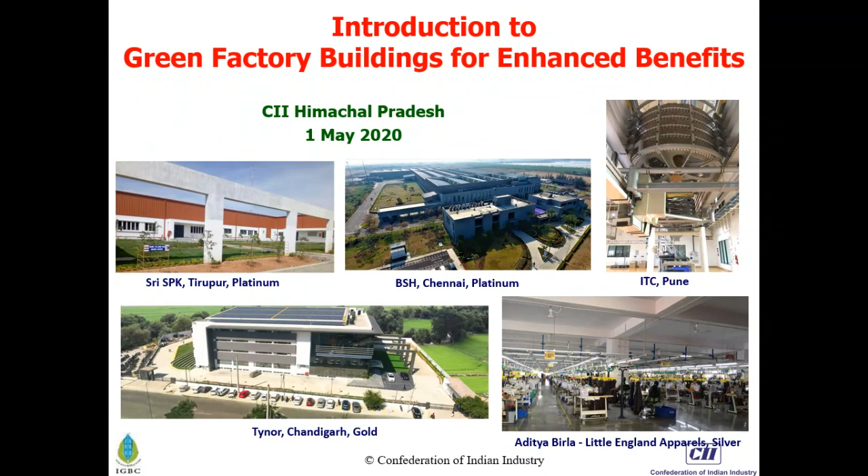Good afternoon, everyone. Hope you are able to listen to me and also able to see the presentation slide. First of all, we would like to thank Colonel Pathak and architect Jeet Kumar Gupta ji for leading the green building movement in areas of Punjab, Haryana, Himachal Pradesh, areas which have very rich biodiversity and huge scope with regard to green development. With their support we are getting a number of projects of different typologies.

We are really thankful to them for guiding us, for giving great support in leveraging our best practices with several building stakeholders. So friends, today's interactive meeting is hosted by my colleagues to interact more about the Green Factory Building Rating System, which is one of the programs by the Indian Green Building Council.

For this particular webinar, I have kept two objectives. The first is to introduce all of you to the green building movement in the country, the key concepts implemented over the last 20 years. Then I have kept more about the Green Factory guideline and the implementation showcased by several different types of factories. This will help all of us understand and explore some of the good measures implemented, which are able to offer tangible and intangible benefits to the projects.

So friends, hope you have visited this building. If not, as and when you are there in Hyderabad, possibly after lockdown, please try to visit the building. This is the building which played a pioneer role in the country with regard to green buildings. If you see this building, you will find many different things which we normally don't see in other types of buildings, like there are two pillars.

There are inclined roofs. You will find a lot of green surfaces over the roof. These are different measures which are helping the building reduce energy consumption and provide more comfort to the occupants. With that, it also has practices so that it will not create a hot environment surrounding the building, and with that it achieved the platinum certification in 2003.

And after like 20 years of journey, this building was converted into net zero. So friends, if you understand correctly, a green building is one which provides several benefits with regard to energy, water, natural resources, occupant comfort, and many others. But after 20 years of leadership, you find there are some advancements in every technology.

Friends, when we deploy something and we find some tangible benefits, the propagation, the kind of spread, is much faster than getting some intangible benefits and having a very slow path. So friends, green building offers several benefits. They provide optimum performance of the building, and because of that only, the building played a leadership role since 2001.

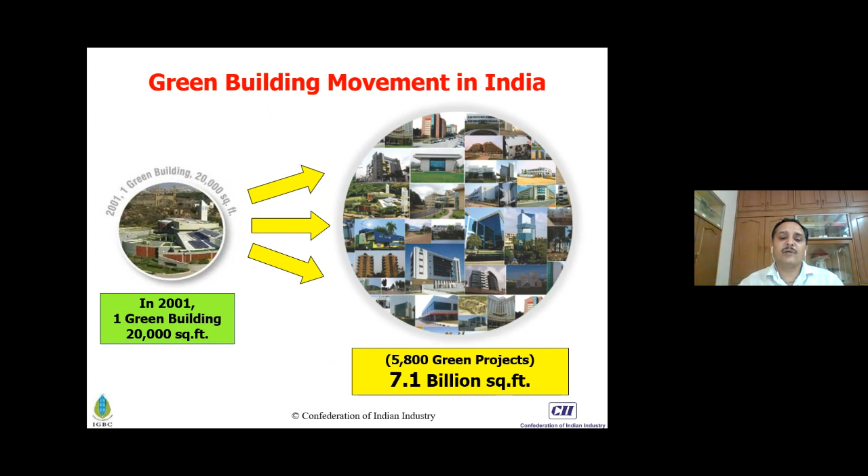Today we have more than 5,800 green buildings registered in the country. Many more than 2,000 are fully functional, fully certified, and this includes the total green footprint of 7.1 billion square feet. Friends, it is your contribution where, with support of your leadership roles in different parts of the country, this graph can be achieved, can be taken to great heights. There, India can become a global guru for the rest of the countries.

So friends, when we talk about the role from different individuals, here we see some scorecard. Today, more than 5,800 projects are registered with green buildings, and this encompasses more than 2,000 members from different organizations and companies. Today, IGBC has more than 27 chapters. This means we have presence all over the country in almost Tier 1, Tier 2, and Tier 3 cities.

Friends, without rich academia or professional development, a sector cannot be grown. Likewise, green building cannot have more wings if there is no professional available offering services related to green building. In 2001, it was realized well in advance, and IGBC started an exam called IGBC AP, Accredited Professional, and today there are more than 4,300 professionals serving the country for different types of products and green building certification programs.

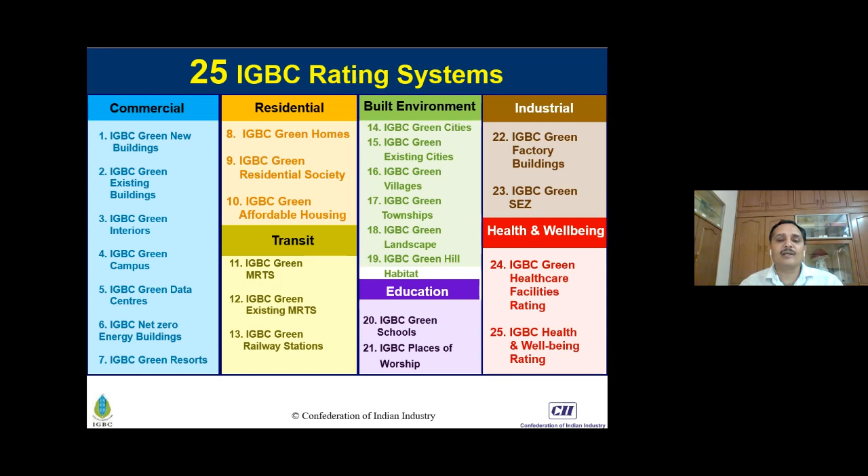In the last 15 to 20 years, IGBC has developed different types of rating systems. They are serving primarily commercial, residential, transit, built environment, education sector, health and well-being, and there are building codes available for industrial building typologies. This is a learning which IGBC has understood well in advance, to have different rating systems for different typologies. We cannot have a rating suitable for an office and implement the same replica for a hospital. So likewise, sector specific, typology specific rating systems are developed.

Another good example is whenever we think about green, our mind would always go to the areas where we find windmills or renewable energy sources, or sometimes we may think about water efficiency. A drop may give more literature to us to think about how water is precious for us to save in different typologies of buildings.

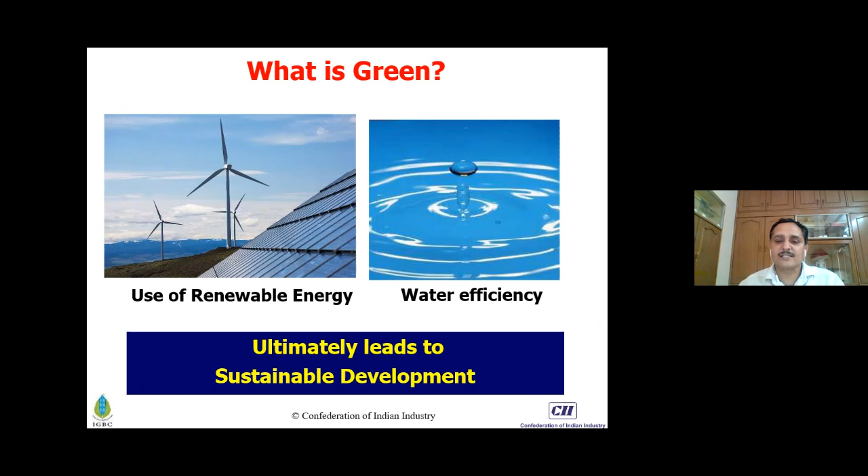Ultimately, all these imprints are the real cause for sustainable development. So friends, when we talk about sustainable development, it is not our greed where we try to capture each and every component of the resources available to us, but we use all these resources very wisely so that it doesn't create any harmful or negative impact for the rest of the globe or the environment.

So friends, when we say green building, we should think about what is the definition of green building and how it has better features than a conventional building. A green building is one which uses less water, optimizes energy efficiency, and generates less waste, which will never have any impact on the environment, and it provides healthier benefits. It provides healthier spaces to the occupants so that they are more productive in the buildings. They have lesser absenteeism, and their health is better than in all other spaces found in conventional buildings.

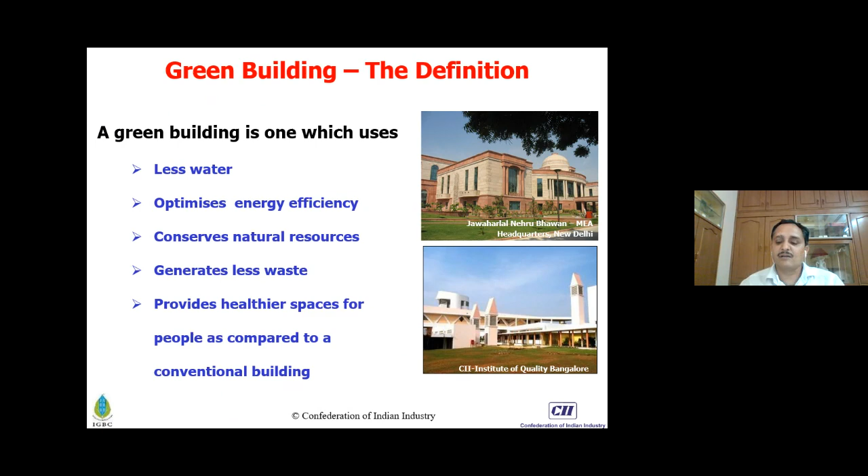So friends, green building has a set of areas with regard to site selection and planning. One is water conservation, the next is energy conservation, and the material resources we use for several building typologies - how to optimize them. This is a very important area, and material is one which creates a lot of negative impact for the environment. If we allow more and more transport of material, it creates negative impact. We have to reduce it, we have to optimize it.

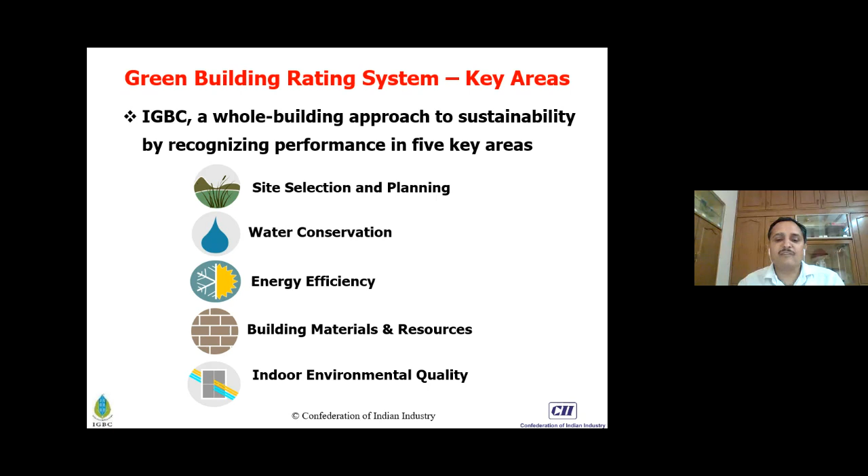Friends, the most important part is indoor environment quality. Indoor environment is a very wide subject, and I have put some examples. You will learn about more benefits of green buildings addressing IEQ.

So friends, the areas which I have put in the previous slide are not having much differentiation from our ancient generations. Earlier we used to say Prithvi, Jal, Agni, Vayu, Akash. They are transformed, they have new nomenclature so that the modern generation can understand the impact and implement all the deployments.

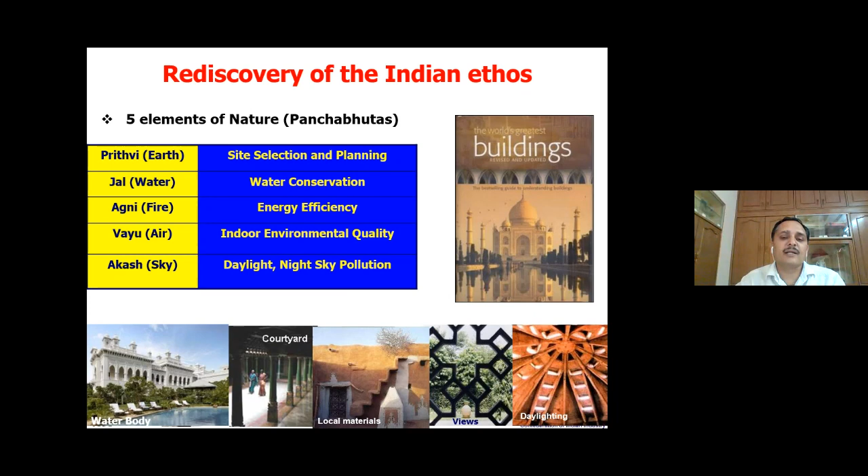So friends, I hope you have visited some green buildings. Do you find any differentiation with regard to aesthetic appearance? I feel the appearance of a green building and a conventional building may look the same, but the performance, the kind of implementation, would be far different between a conventional building and a green building.

Green building offers tangible benefits from day one. When we design it, we select different types of equipment, different types of systems which are far more energy efficient as compared to national or international practices or building codes.

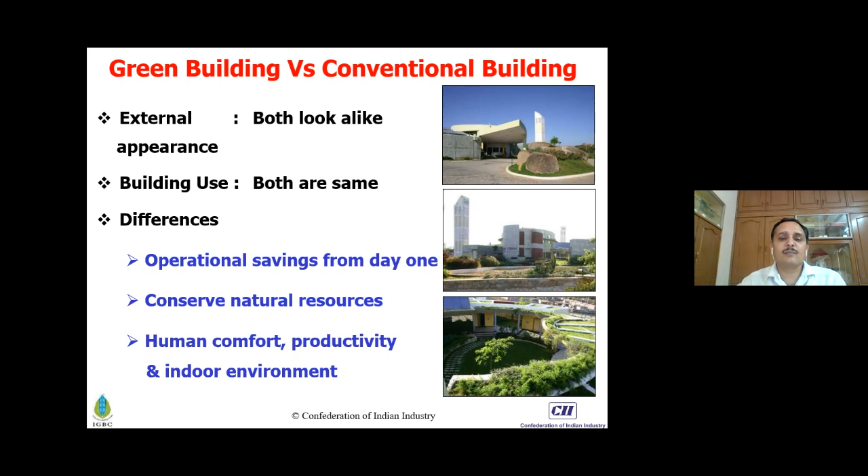So when we say about tangible benefits, if we find some monetary benefit out of any of the implementation, we are really interested in them. So green building has created an interest for all the stakeholders. They provide more than 30 to 40%, even sometimes 50% energy efficiency to the project.

And if I take some examples, water can be reduced from like 30%, 40% till like 60 or 70%. There are fixtures, faucets, items with regard to water available which have significant reduction in the baseline water consumption. So friends, green building offers us benefits from day one, and our initial investment could be much lower than a conventional building.

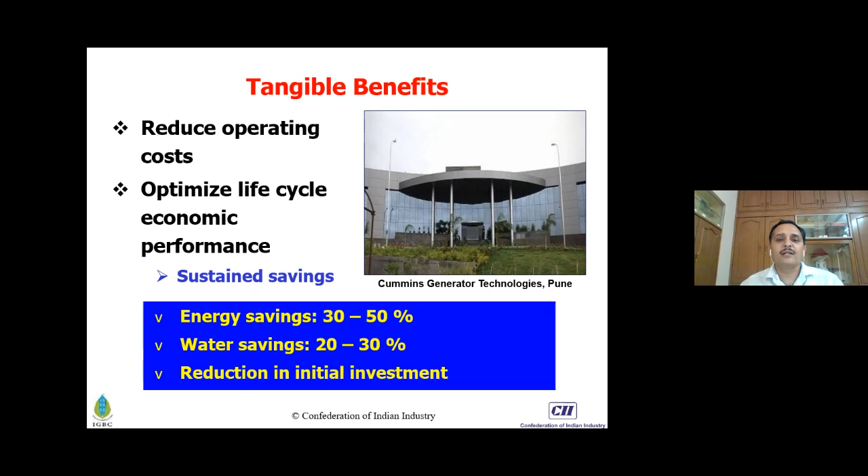We have taken some examples here. Some early adopters like Wipro and ITC have realized significant reduction in cost or operational expenditure. In many of the buildings, they are able to save more than 40% to 50% of energy use, and their operational benefits are far better than what we understood during design. Some of the buildings have achieved recurring savings, and they are able to do more retrofitting and get better benefits today because of the green building concepts.

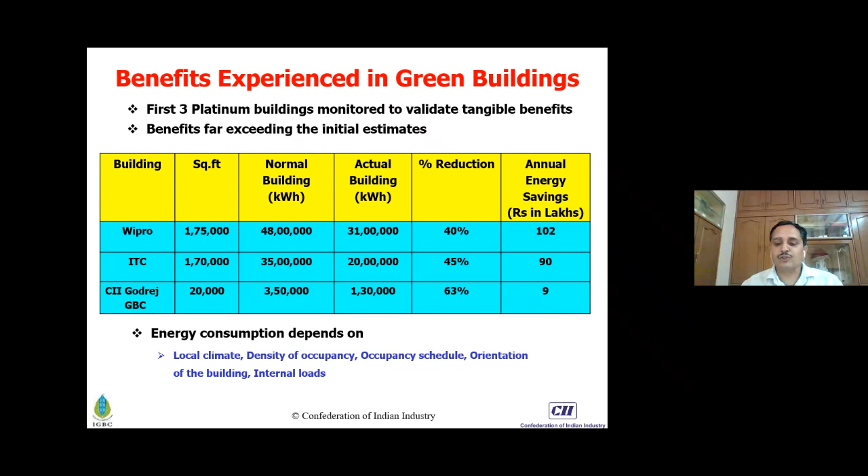So friends, with regard to intangible benefits, any building which is not giving monetary benefit could still have significant benefit relating to our productivity. Take an example: when you are sitting close to a window and you see the outdoor, you see the nature.

Nature, having more and more diversity, more different kinds of features - your mind will have some impact. Our mind will have more energy, more refreshment. So when we think about green buildings, they connect occupants to the outdoor. Hence, they are able to have more and more productivity in such buildings.

And there are some guidelines published by World Green Building Council. They have really put forward the different benefits of green buildings with regard to productivity, lesser absenteeism, and the kind of oxygen which occupants may get in a green building will not be found in a non-green building, just because introduction of fresh air is mandatory in all types of green buildings.

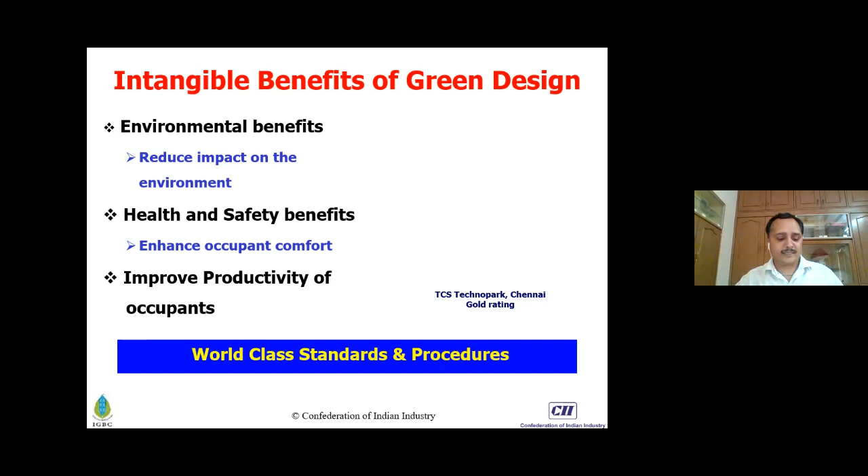So friends, there would be questions from all of you, but the more often favorite question for everyone: do green buildings cost more? I would say it is the stakeholder who takes decisions whether the cost of the project would go up.

Or it should be optimum, or how it can be reduced to a level which can become a benchmark for many of the sectors. So friends, when we design a building, if we put our wisdom, our thoughts, and give sufficient time to the architect to think and then design the building, definitely there would be revolutionary changes in the buildings and it will not cost more.

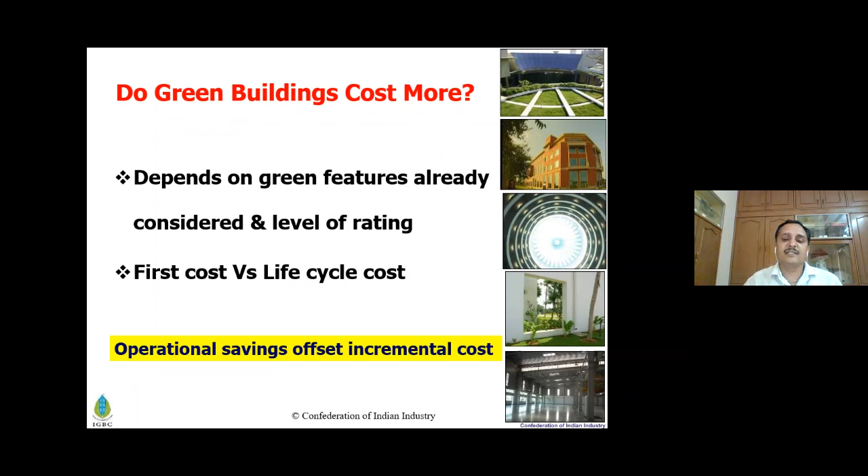There are several examples in today's world where it has been showcased that green building costs equal to non-green building, or sometimes there could be lesser cost, or if cost is 5%, 10% more, it can be recovered within 1 year, 2 years, but within 3 years time frame based on the type of deployment or implementation of green measures. So friends, this is not new data, but some of the early adopters found the incremental cost and the recurring benefits.

Sometimes the payback was like 5 to 7 years, but today if we think for a large size project, the impact is almost negligible, and their incremental cost hardly could be 1%, 2%, or even lesser, as I mentioned earlier.

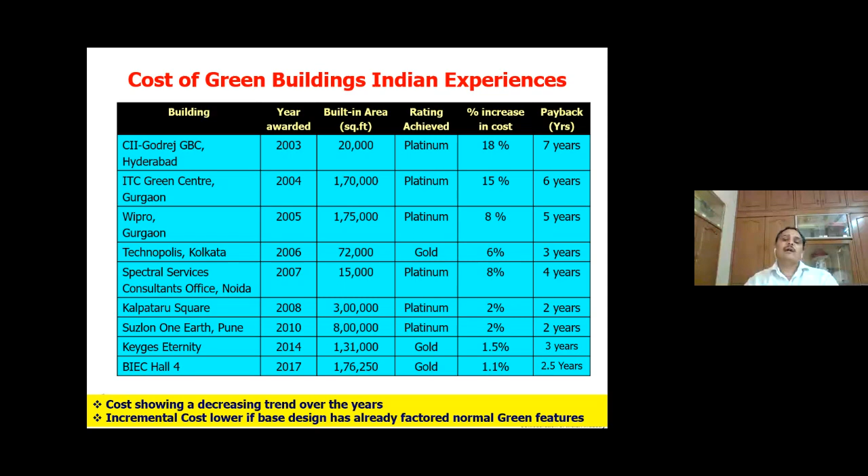So friends, this slide is very big in content. Maybe it is looking very small to all of us, but green building has changed the team effort. The integration has been added to the projects now. If we think about any project, what kind of good impacts it has just because of the green building, then we have to relate all the 5 areas and their related implementation.

Green buildings have offered tangible benefits while comparing the savings with the latest standards and codes. You may refer to National Building Code 2016, ECBC Energy Conservation Building Code 2017, ASHRAE, IPMVP - one protocol, one guideline which is used to validate the performance after 1 year when we compare the design performance and the actual implementation done in the project.

There are key benefits. Like earlier, we used to have air conditioning load very high for any space, and then putting higher tonnage in smaller areas.

Today, if you see some of the good buildings, their square feet per ton - this means how much area is served by how much tonnage - it has gone beyond 500, 600 for projects where radiant cooling has been implemented.

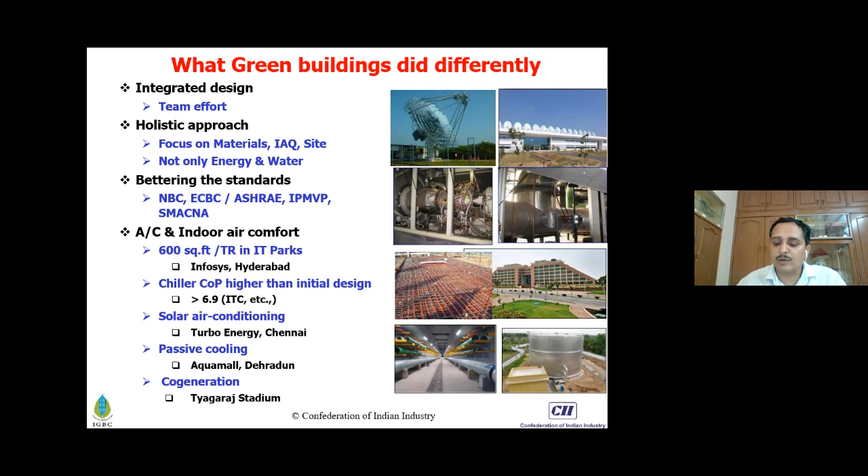So friends, when we talk about performance, there are several parameters. I hope we may come up with more webinars sometime, and we can discuss more about other implementations with regard to technology transformation.

If you visit any airport, you find today waterless urinals. In our building, when we deployed these measures in 2002-3, the cost of waterless urinals was more than 15 to 20,000 rupees. Today you can procure it for 4,000 or 4,500 rupees. Compare in 15 years how their cost has reduced. It's a good example of how mass movement has happened for the users, how we increased the demand so that cost has gone down.

Similarly, there are examples like light pipes we never saw earlier, but today several buildings, especially factory buildings, instead of using artificial light, are simply using light pipes. I would showcase some photographs where many factories have put light pipes and they are having daylight, no energy use, and better than artificial light. There are several examples related to this - we may find some for different types of buildings, some related to different implementations.

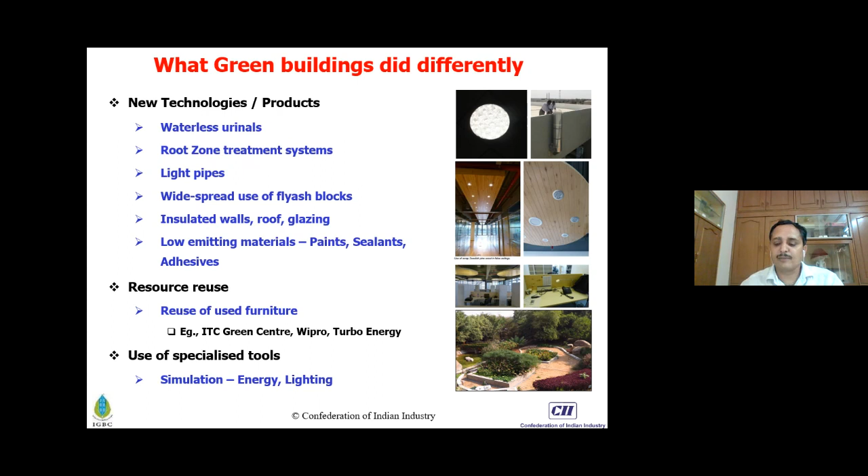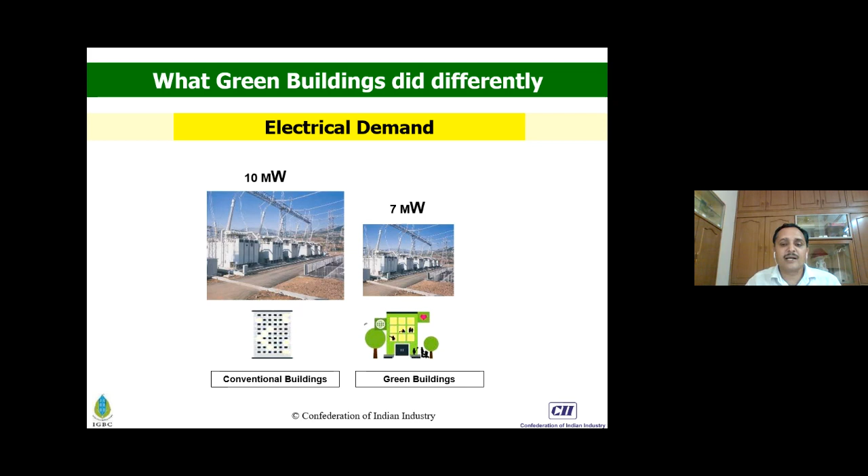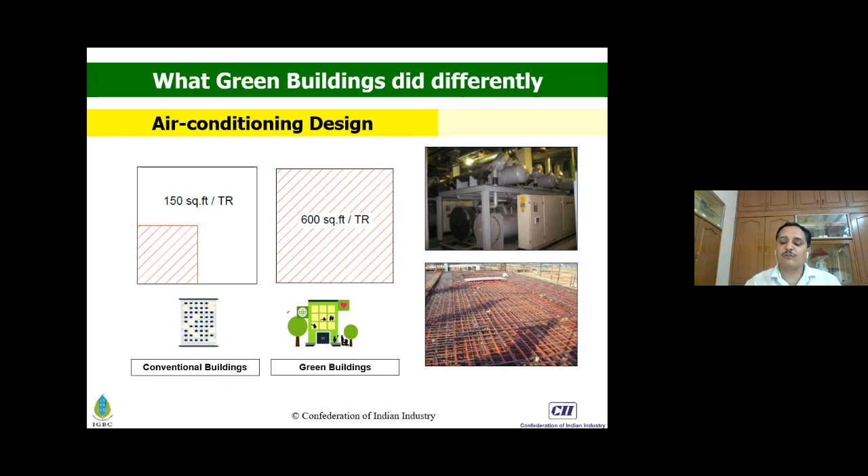There could be another example. If we go to the shopkeeper to purchase an AC, he would ask the area of the room - say 100 square feet - and propose a 1 ton AC. If we increase the area by 20%, say to 120 square feet, suddenly the shopkeeper would suggest purchasing a 2 TR AC. Is it wise that a 20% increase in area has increased the tonnage by 100%? It can't happen. So green building has created a baseline - earlier it was much lesser, could be 100 to 150 square feet per ton. Today it is 400, 500, even 600 square feet per ton for some projects. This has reduced the energy demand of the building.

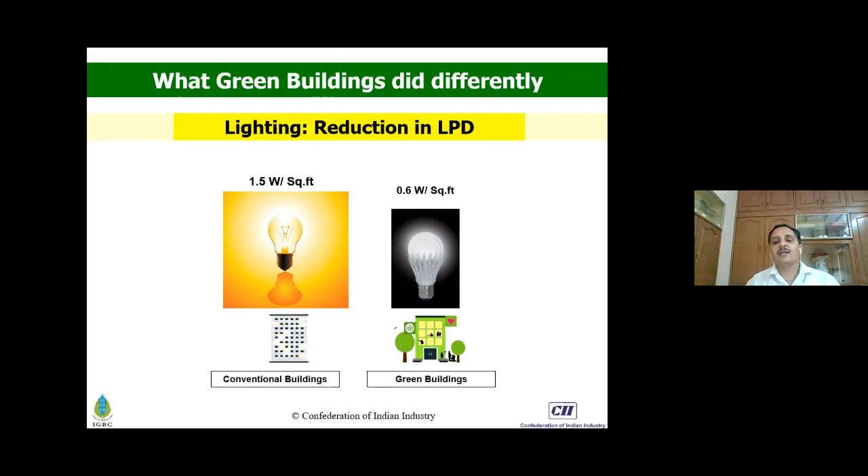I put this example earlier for building design: it was a myth to use 1.5 watt per square feet of lighting load. But today, if you refer the Energy Conservation Building Code for different types of buildings, it is hardly 0.5 to 0.6 watt per square feet. While comparing different methods, they are well defined in the ECBC code. It has reduced about 40 to 50% of lighting energy use in the building.

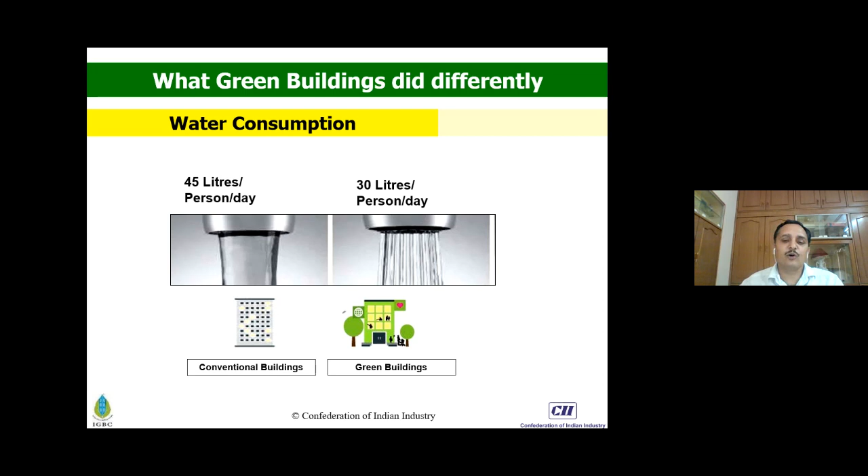When we compare water consumption, earlier guidebooks referred to 45 liter per person per day, but in a green building this consumption would be much lesser than the baseline. Several buildings operate at 25 liter per person per day or even lesser.

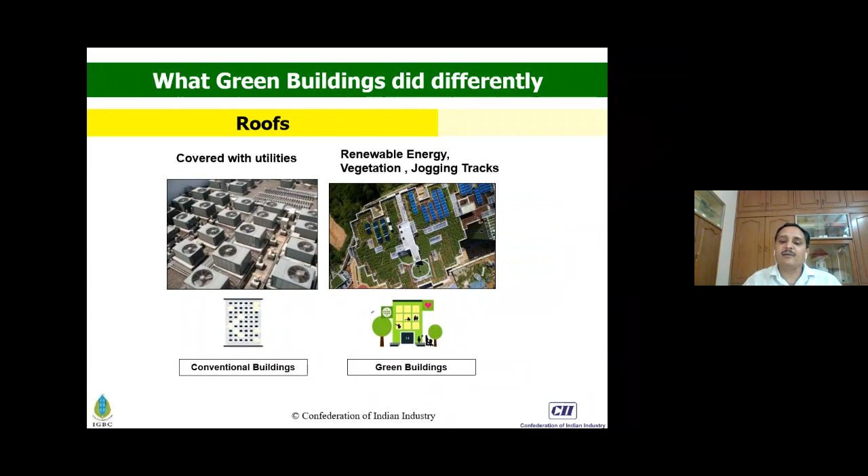Friends, the roof earlier was found with only utilities. Today we find more and more green spaces. These green spaces try to mitigate the urban heat island effect, which causes more temperature in urban areas and lesser temperature in rural areas.

Green building has facilitated more than 300 megawatts of renewable energy, and thus it has created a great momentum for the RE sector itself in the country. With regard to green factory certification, it defines the green implementation and sustainable practices for buildings, and recognizes different conditions for different climates. It has created a path for the whole industrial sector to transform with regard to energy benchmarking and water treatment systems put in every industry for sewage treatment or effluent.

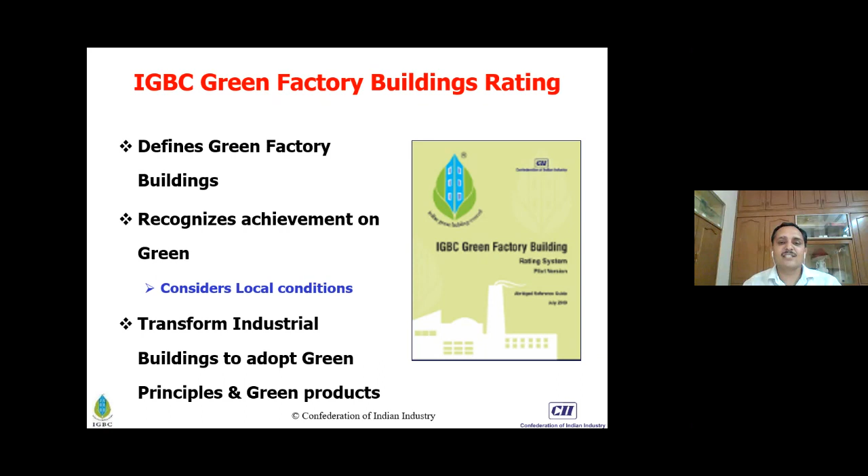When we talk about green building, it addresses 5 areas. The first area is site selection, or sustainable site planning - measures we can put in a site so that we are not losing any local benefits available. The second area is water conservation. Third is energy conservation. Fourth is building material and resources. And finally, the most important part is indoor environment quality, which has several parameters to enhance the productivity of occupants in buildings.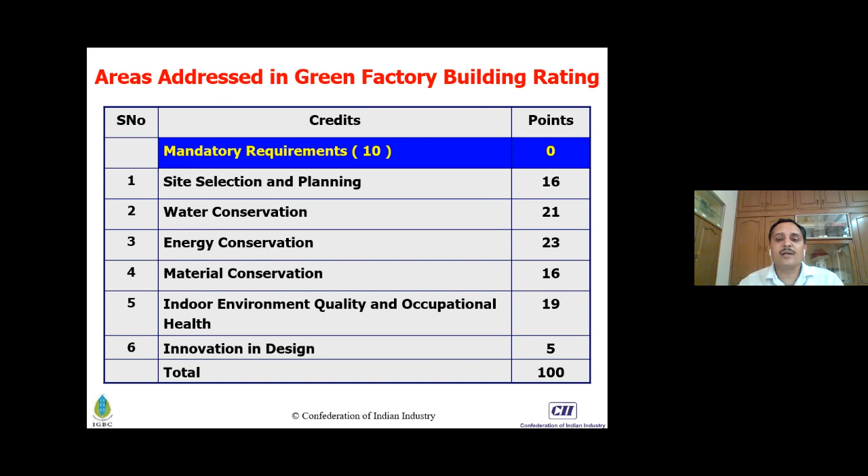The last area is kept open for all stakeholders. If they find any new implementation which is rare in any sector, and they find it relevant with more tangible benefits for the project, IGBC accepts this kind of implementation. In this slide, there are total 100 points, categorized in different areas, and after considering all the points, a green building certification would be awarded.

I have put one example here of the different measures addressed in sustainable site planning. We primarily focus on local regulations for a building or industry to follow, then there is a prime focus on soil erosion prevention, and many other parameters related to access to public transport, basic amenities provided, natural topography, how landscape has been designed, and urban heat island effect related to roof or non-roof areas.

Finally, there are certain requirements with regard to what facilities have been created for the disabled, and how a project has been able to reduce nocturnal pollution, which creates burden or disturbance for birds.

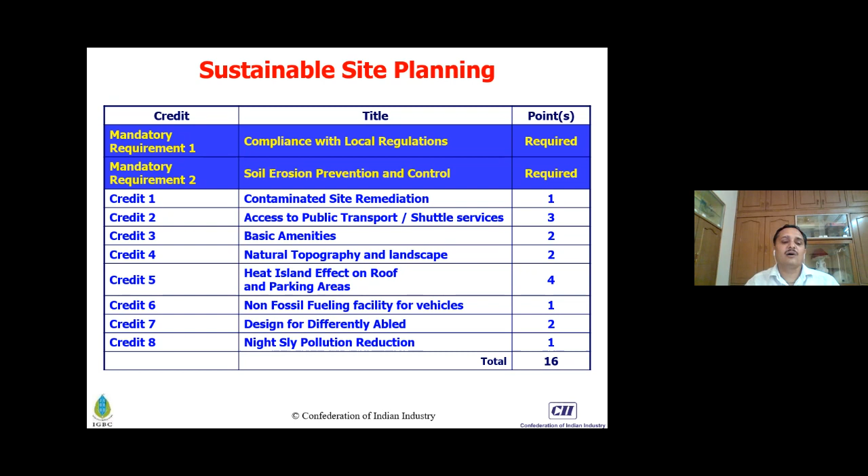Our presentations are not theoretical, they are examples of real implementation. I have put some examples here with regard to sustainable site planning. One such area is how to reduce the erosion of soil and maintain good fertility of the soil, not losing any fertility when we construct a building or factory. Soil is one thing which cannot be changed or converted back to fertile after just a year or so - it takes more than 100, 200 years to get the fertility back as it originally was.

Here again, I have put examples of how a green building would differ with regard to urban heat island mitigation. In one example, you'll find the photograph of GBC Hyderabad, where the whole roof is covered with vegetation. This reduces the temperature of the roof, but that's not the prime objective - primarily the vegetation helps reduce the urban heat island effect. Once we reduce this, the surrounding temperature of urban areas would be lesser than the outskirts.

Similarly, there is an example from Triveni Turbines - one of the good factories with so much biodiversity, rich in garden areas. It has completely seemed like a building with more and more garden, not a factory. Similarly, a very good example from Thermax.

They have considered all green measures from the design itself, and these measures awarded the project a platinum certification in Sri City. You can find the whole roof is completely white, with lots of daylight penetration providing good daylight for the whole workspace. This means there would be no artificial lighting use during the daytime, and this factory sometimes operates for 2 shifts without requiring any artificial lighting for energy use.

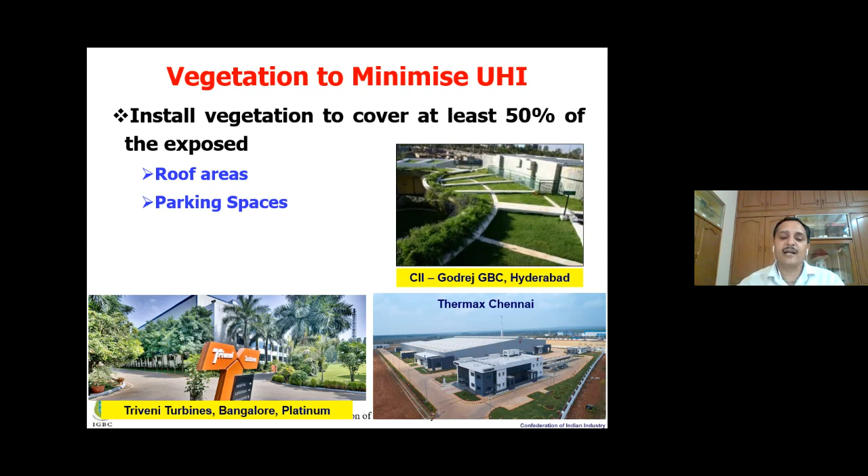Friends, similarly, the next area is water conservation. You will find a lot of building bylaws where certain things are mandatory, like rainwater harvesting, or putting more energy and water efficiency in faucets and fixtures, and having a landscape area with limited turf to reduce water usage, using species that are not consuming much water. These species are adaptive and drought tolerant.

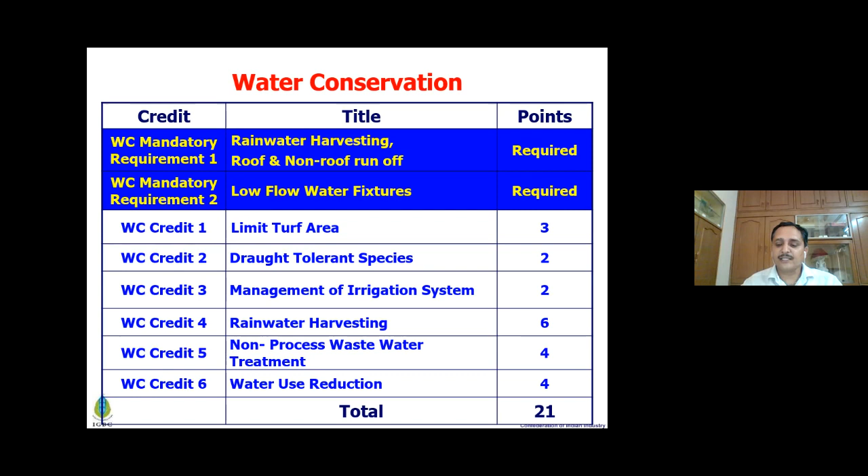There are measures related to irrigation systems, and we award points based on enhancement in rainwater harvesting or water efficiency. Water is an important area and carries about 20% weightage in green building guidelines. I have put some examples here.

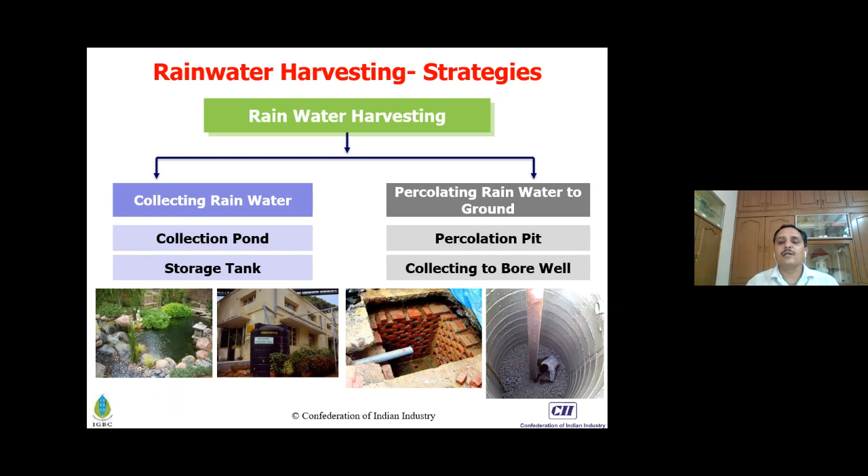You would find some different alternatives. We may go for collecting rainwater, having a pond or tank, or we may think about having a percolation pit where water will be recharged and the ground table will be higher.

Again, there are some more examples in projects where the site area is very high, like big factory setups. It becomes very difficult for them to harvest such large runoff quantities, or collect it in a pond or tank. It becomes very expensive for them.

Several projects, just to avoid this and have better implementation, have gone for providing ponds. You will find, like in Noida Metro, they have provided a very big size pond, and the cost of constructing a pond is much lesser than providing a water tank.

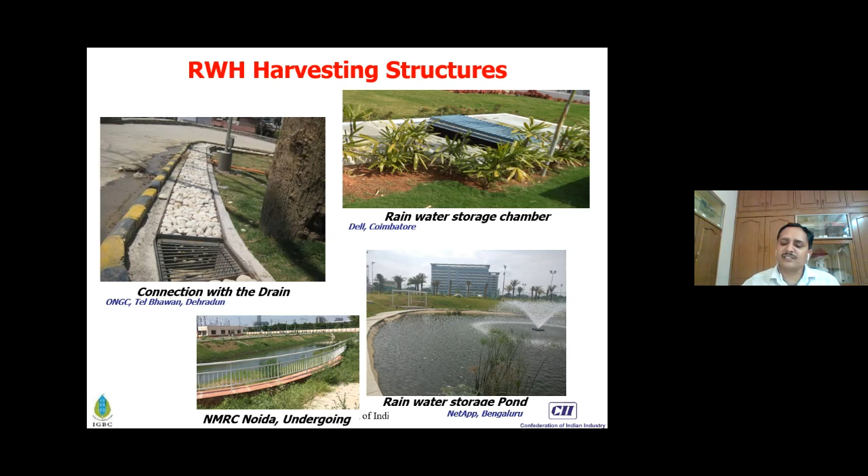So friends, there could be different cost aspects with regard to rainwater harvesting, as Colonel Pathak mentioned in the initial welcome remarks. There is good implementation, but what about the cost? Sometimes cost would be much lesser if we provide a pond, but we still meet the requirement. There could be several other examples that reduce the cost.

Friends, the left top photograph is from one of the factories which was facing great difficulty in implementing rainwater harvesting because of the very high cost. After our visit, we recommended that if they find difficulty in rainwater harvesting or constructing a tank, they have another option of percolation, but even percolation would be a costly matter, having 20-30 percolation pits there.

Then we recommended them to have an open pond, with the pond area having some sitting spaces all around it, which creates a very aesthetic impact for all the occupants, and the cost reduced more than 10 times. The cost of this pond was hardly 3 lakh rupees, but it could be more than 50 lakh if we construct a tank there.

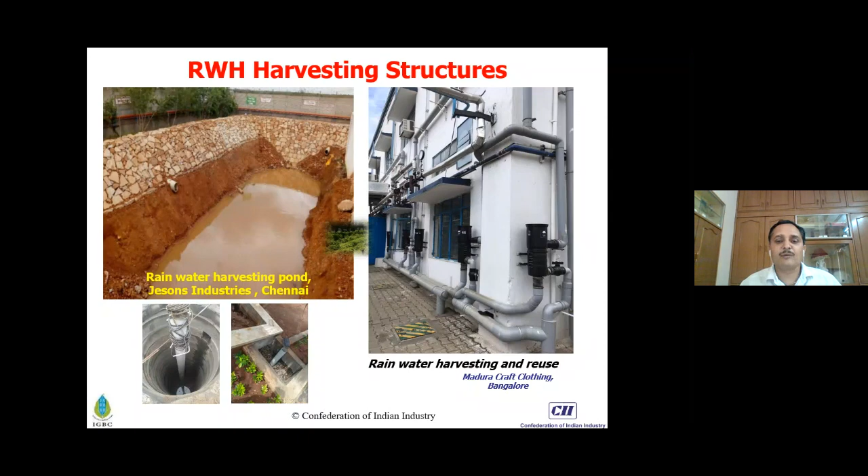Similarly, in another example, some projects collect rainwater and then reuse it, for example for irrigation, or for cooling tower, or some projects make it more filtered and use it for process activities. So friends, there are several examples, and projects may implement based on their choice, based on the area, and finally the cost implications.

This is one project where urban heat island from non-roof areas, which is not part of the roof, has been completely eliminated. You have seen this photograph where they have put tiles which have some different holes, and these holes are covered up by green grass. We call it open grid grass pavers, and these are able to mitigate the urban heat island.

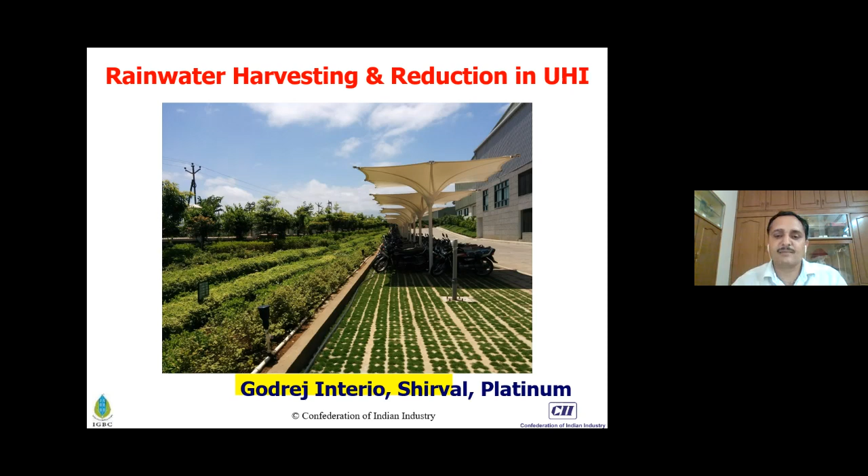At the same time, these ulta chatas or umbrellas try to have rainwater harvesting, as well as provide shade. They have created shade for all the vehicles parked in the factory. And then you find some landscape here which is native, drought tolerant, and has a good drip irrigation system installed, so that it reduces optimal water usage there.

Friends, this is another good example, from Hero MotoCorp, where they have put rainwater harvesting ponds throughout the track, and these are helping them store a huge quantity of water, which can be used for several other applications.

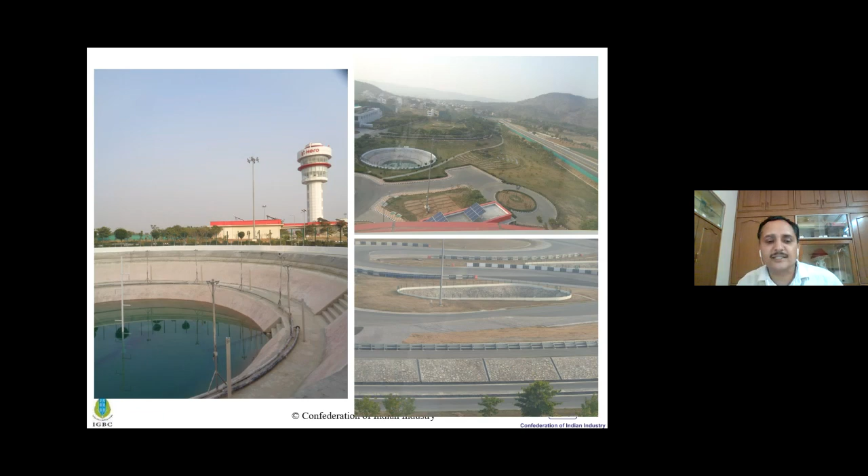I hope you are able to differentiate the different types of implementation here. We earlier used to see sprinklers for irrigation, but after some time we found technology interventions, and drip irrigation became a method used in most factories.

Even after that, some clients reduced water use further by putting in moisture sensors. But the example I put last is called ozing, with porous pipes. These porous pipes are made with recycled material, which could be like vehicle tires also. These small packs or tubes are perforated and laid down about 6 to 8 inches below the soil, based on soil condition or properties.

And this has automatic pressure regulation, just because of the concept of sweating, and that would allow moisture out when the soil is dry. If soil is not dry enough, then moisture will not go. It is very similar to our skin. When we sweat, when there is more temperature difference between our body and the surrounding, then our skin will evaporate moisture. Similarly, it works on that principle. And I believe this is the most advanced technology.

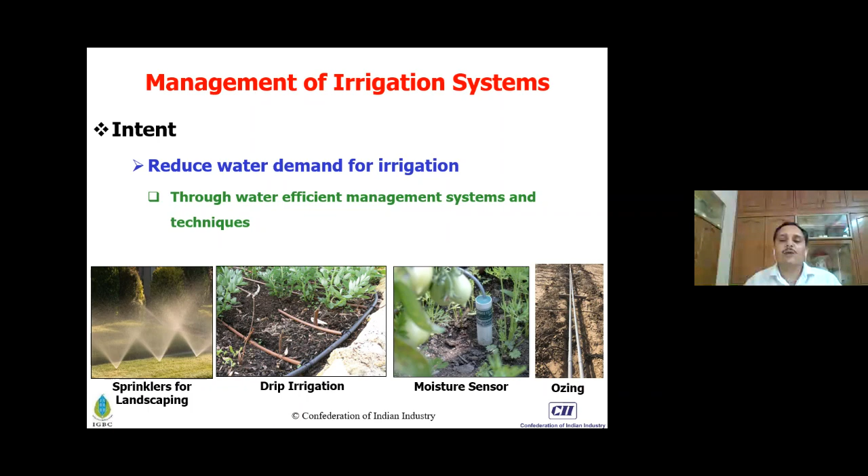This is the most advanced solution where water would be reduced by 70% to 80%. In one of the projects, it has been completely implemented throughout the landscape. There would be no space where they have put some sprinkler or drip system.

Friends, this is related to energy conservation. I hope everyone understands energy efficiency well. It is the only area where we find the maximum tangible benefits. We may get some benefits in water, some benefit in site and other areas, but energy is one which gives real impact within the shortest period of time.

So friends, the most important part is what kind of refrigerant, what kind of air conditioning system we should use, so that we try to reduce global environmental impact from more CO2 or more ozone depleting potential. If you remember the refrigerant family earlier, many air conditioners or fire suppression systems used CFC based refrigerants. But after CFC, we found HCFC type refrigerants. After HCFC, there is another family, the third generation, where most refrigerants are HFC based, but we are not limited there.

Green building concepts, green building philosophy has made a new transformation for the whole sector. Today, if you talk about some of the largest projects, they don't use any CFC. Although CFC is no longer allowed in the country, and we cannot even purchase it - it has been banned since 2008. But some projects thought to use HCFC or HFC based refrigerants, while adopting green building principles they cannot use them.

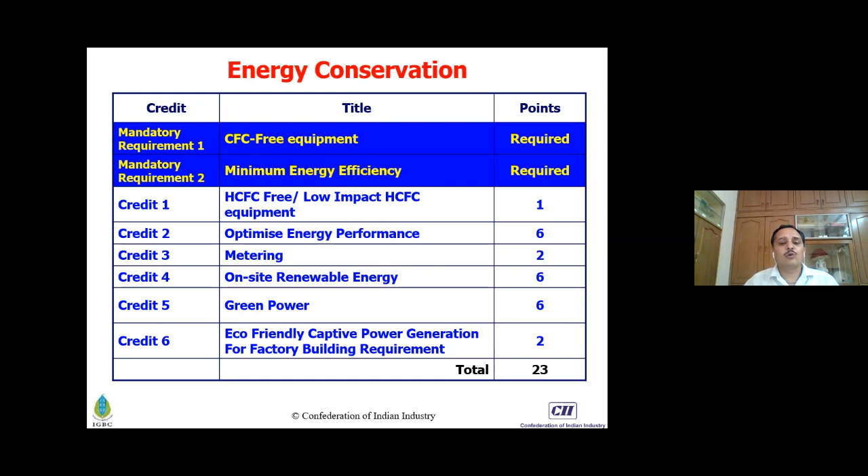Friends, renewable energy is very predominantly used in green building projects, and we call them on-site renewable energy sources. We may put solar photovoltaic or small wind turbines, and there are solutions available for green power, which is off-site renewable energy. There could be some solar plants put away from our plant. They may provide us green power by having a power purchase agreement or some agreement with the DISCOM. There could be some other examples which we may discuss later on.

Friends, when we go back to energy performance, there are certain standards, and these standards help us have benchmark performance—like what codes are used for energy efficiency, what codes are used for ventilation. When we use all these codes, it gives us feedback on what could be the minimum requirement for energy or for ventilation.

While considering the case of COVID, do you feel the measures are sufficiently fine for a factory building? We should say there would be ventilation requirements going beyond energy efficiency. Today, because of COVID, many people are much worried about whether proper ventilation has been provided in the factory or building. But going for a green factory, making sure every ventilation implementation is there, makes a good impact for all buildings.

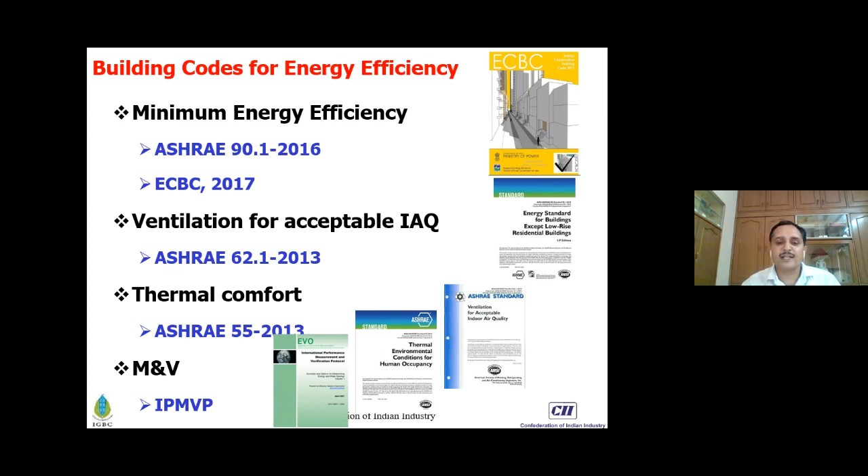There are other requirements like measurement and verification protocols, and they help us diagnose the energy efficiency after a year or so. Friends, I have taken some examples here. We have very limited time.

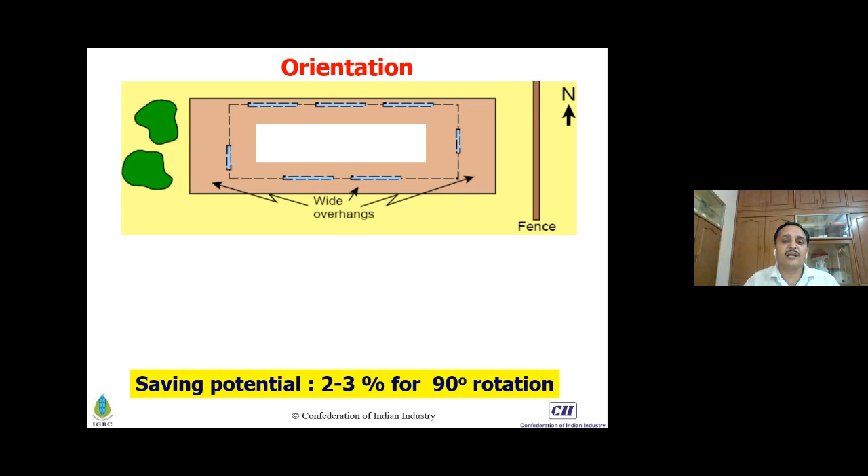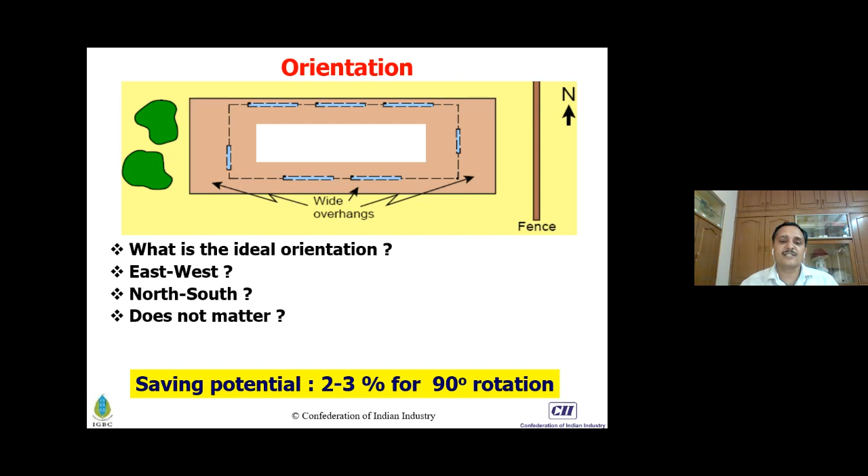When we orient a building in the right proportion, it may offer us good savings, and this savings is for the whole lifetime of the building—getting 2%, 3%, or even 0.5% savings over 60 years of the building's life makes a huge impact for us. So what could be the right orientation? It depends on location, and we have to exercise this using computer simulation tools, which definitely tell us the right proportion.

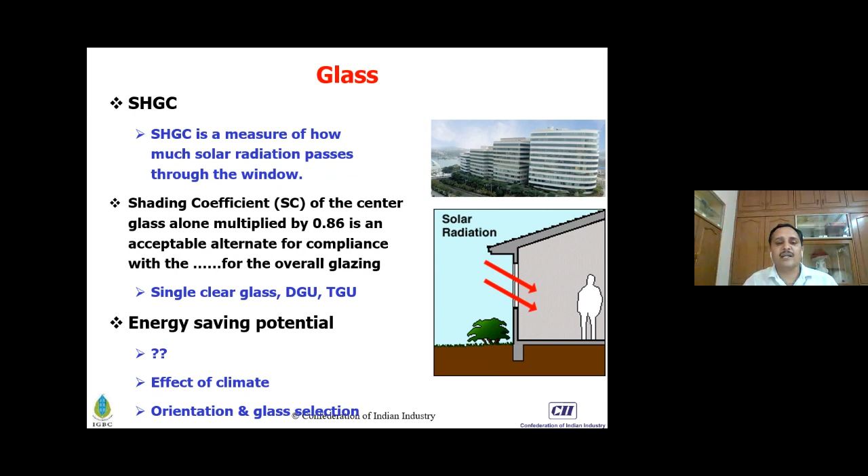When we talk about buildings, sometimes we see less glass, sometimes more glass, but it's a wise decision for us which glass is good for our building, and green building addresses it. Glass is not only about heat—it protects against heat when we use energy efficient glass. It gives more daylight, more outdoor connection, and occupants close to the windows are well connected. In many ways, it helps us achieve better productivity and also reduces artificial lighting use.

Friends, this is one example where we put some retrofitting for our building in Hyderabad. On the left side, you'll find the lighting fixtures which were CFL based, although they were imported from Belgium in 2001 and were the most energy efficient fixtures at the time. Their energy consumption was 72 watts per fixture, and the efficacy was very low. When we talk about lighting fixtures, we call it efficacy, and efficacy represents lumens per watt.

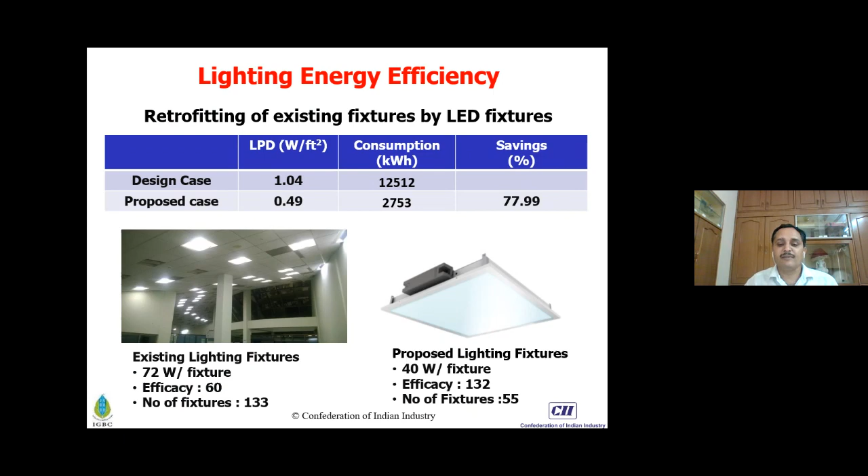Today, if we see LED fixtures, their efficacy is very high—it could be like 130, 140 or so. When efficacy is high, the lumens are more and wattage gets less and less. With that, we retrofitted and got more than 77% savings, and about 4% reduction in cooling.

Friends, this is another example. You can see the GBC building, and in the middle, the chiller we had earlier was most energy efficient—it was a water cooled chiller having a COP of about 3.8 or so. But recently we retrofitted the whole chiller plant, and it is now most energy efficient, having a very high COP, and the IPLV is absolutely very high.

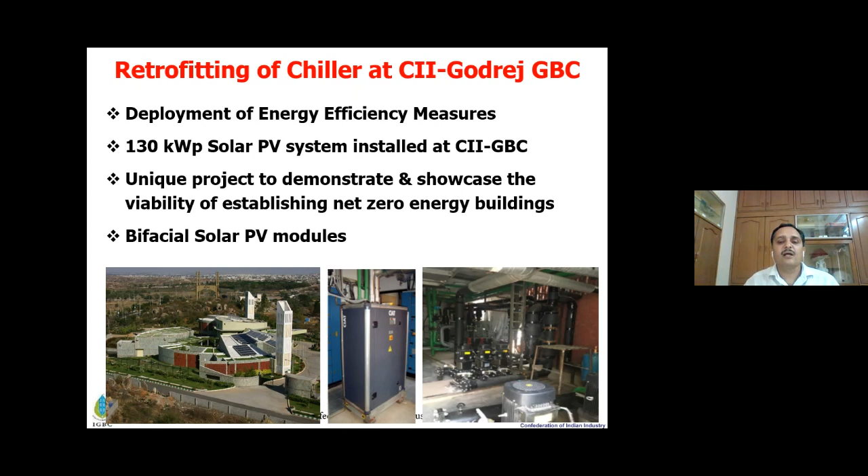Friends, we have put in bifacial solar, we have retrofitted the chiller, and just because of this important retrofitting, our energy consumption has reduced more than 60%.

This is another example for building metering and monitoring. Friends, if we meter the energy consumption for bigger consumers like air conditioners, or processes too, tomorrow it will give a decision whether to go for retrofitting or not. So it is quite important.

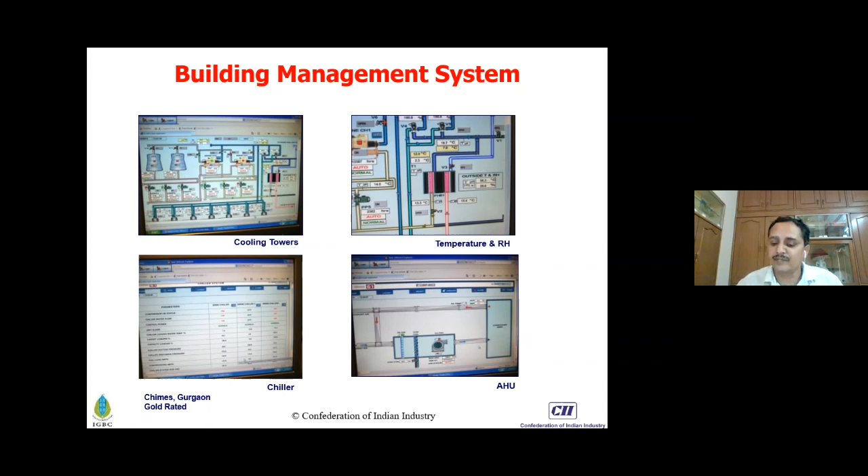Nowadays the building management system may be integrated with sophisticated tools like fault detection, diagnostics, and prognostics, so that they give true feedback on whether equipment is operating, when it will fail, and when measures for retrofitting are needed. So we get very sophisticated information, and we take the decision there.

So friends, this is the last module, related to building materials. I will not have much time here, but I would like to tell about 2-3 key concepts.

One thing is we have to manage our waste, whether process or non-process. If we use the right approach with different segregation at the source, it will solve our problem. Tomorrow you would find more and more programs creating a guiding road and pathway for all buildings to manage waste and go for circular economy.

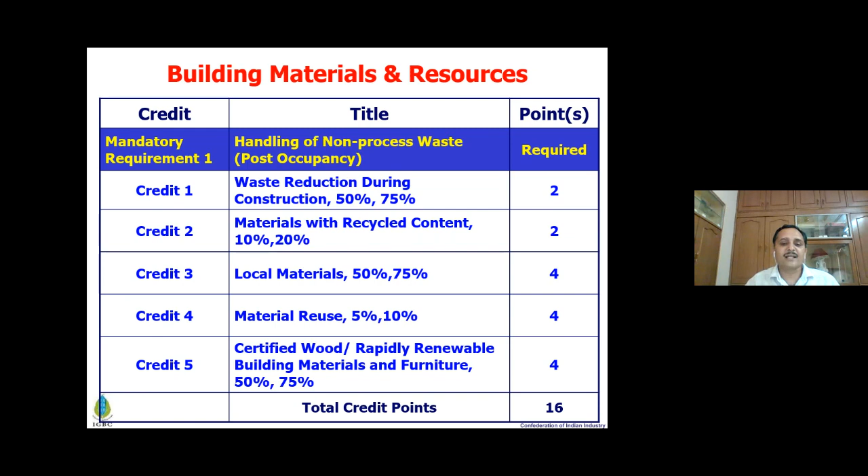Material should be local, materials should have more recycled content, and materials should be rapidly renewable. These are the key concepts, and very recently CII has launched one program which addresses most of these things.

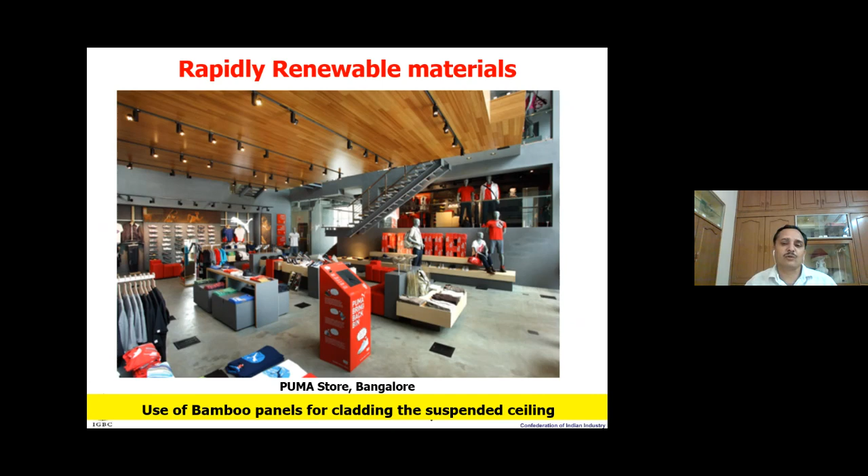This is rapidly renewable material, materials having very short life duration, like bamboo. Today, if we cut the bamboo, again after 5 or 10 years it will have the same growth. So this kind of material is very much promoted in green buildings, and it creates lesser impact for the environment.

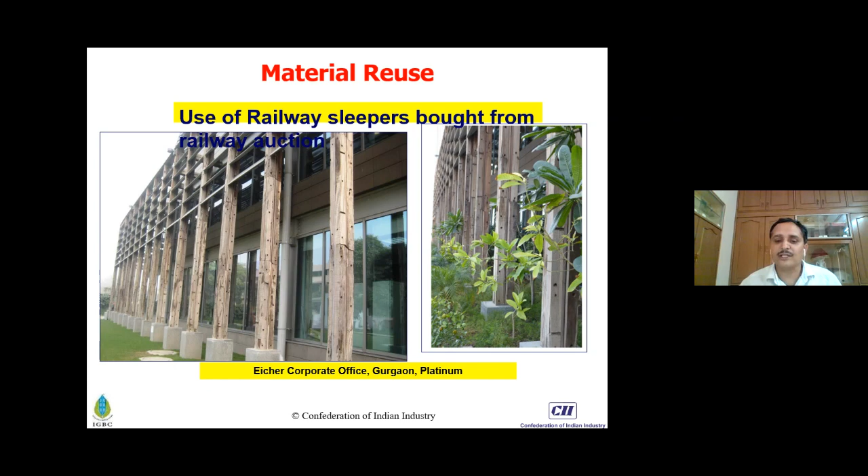We have to reuse materials wherever we find waste. It is not a waste, it is a resource for some other industry or application. Here, railway sleeper pads are used for shading in the exterior, helping the project reduce heat gain as well as achieve good aesthetics.

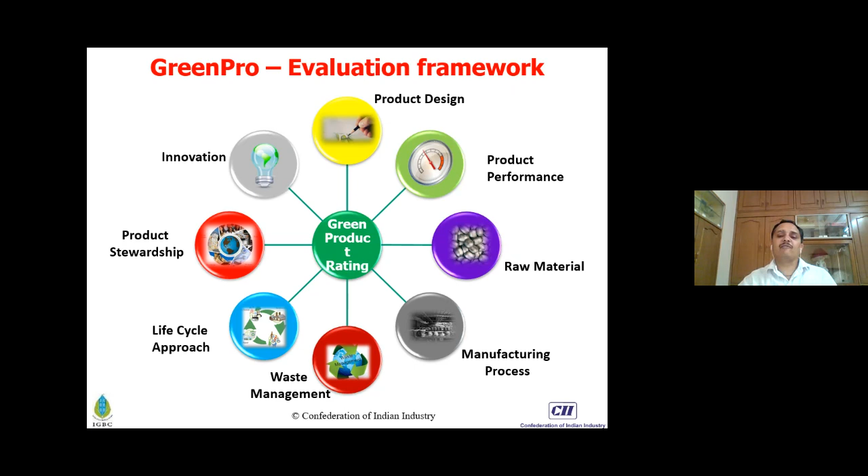Once we procure any product which is GreenPro certified, we are 100% sure every different aspect of the manufacturing has gone in the right way, and it has created lesser impact for the environment with regard to waste or energy use.

With regard to indoor environment quality, it is a very important area, extremely important for all types of buildings, not only factories. When we talk about indoor environment quality, primarily IEQ addresses thermal comfort, visual comfort, indoor air quality, and ergonomics. These are the prime areas addressed in indoor environment quality.

Providing fresh ventilation for green building is a must-do activity, and if we enhance the fresh air, we get more and more reward for it. Today there are several position papers published by societies mentioning that if any project is not having fresh air, it should not operate that particular space. Or there's a guideline that if a space has enhanced ventilation, it has safer indoor spaces.

There are certain requirements like building flush out. When we occupy the building, it may have some smell because of several chemicals that have gone into it. But if we do the building flush out, removing these chemicals by opening doors and windows and putting some fans for 1 or 2 weeks, it will create a good environment for all occupants.

Friends, daylighting is a main criteria here, and providing daylight has lot many other benefits. Finally, there are some requirements with regard to what kind of space we should provide, like the breakout space or a cardiovascular gymnasium.

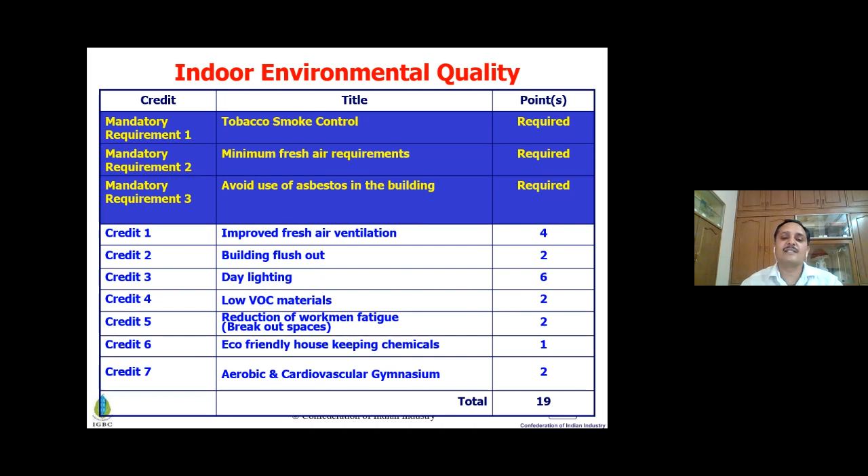Again, I would like to showcase one very small example. Suppose you have an auditorium, a conference room, or a factory area. What could be the total fresh air count we should have for this particular area?

Let us take a simple example. Suppose in your factory you have provided one training area occupying 100 occupants, and the area is 1000 square feet. The calculation uses CFM per square feet, so you multiply 1000 square feet by 0.06 CFM per SFT. That gives you the CFM reserved for the area.

Then some CFM would be based on the occupancy provided in that training room. Suppose the capacity is 100, so we need to multiply 100 by 5, which becomes 500 CFM. So 500 CFM plus the area calculation, which is 1000 multiplied by 0.06, equals about 60. This is the total requirement of fresh air for a given area.

Similarly, we can create this table or Excel calculation for every type of space in our factory, so that by the end of the design or operation, we are making sure every person is getting full fresh air, and this fresh air has the right calculation.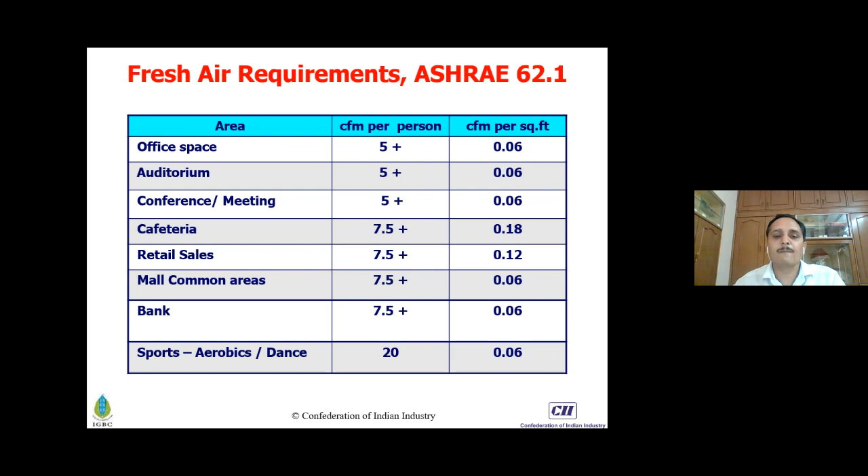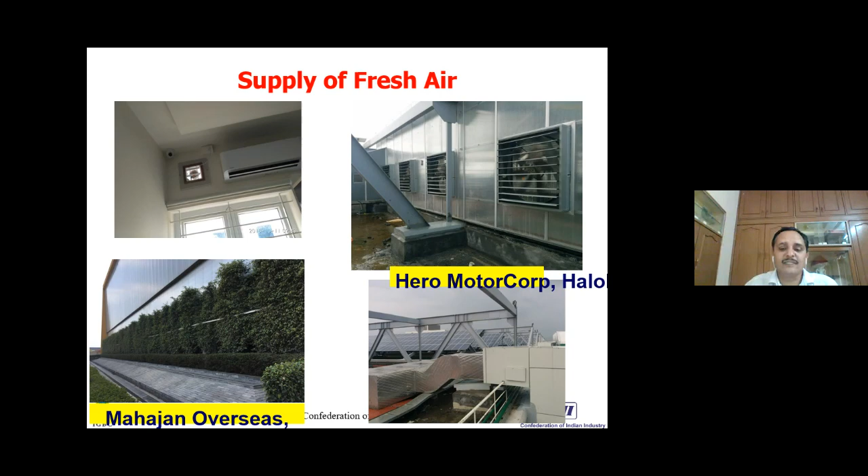Another example is Hero MotoCorp, where they have put a different kind of system that continuously adds fresh air as and when required, because it has auto control with the indoor system. In another example, they have installed solar photovoltaic panels, with vegetation below, and finally it is integrated with the fresh air system as well.

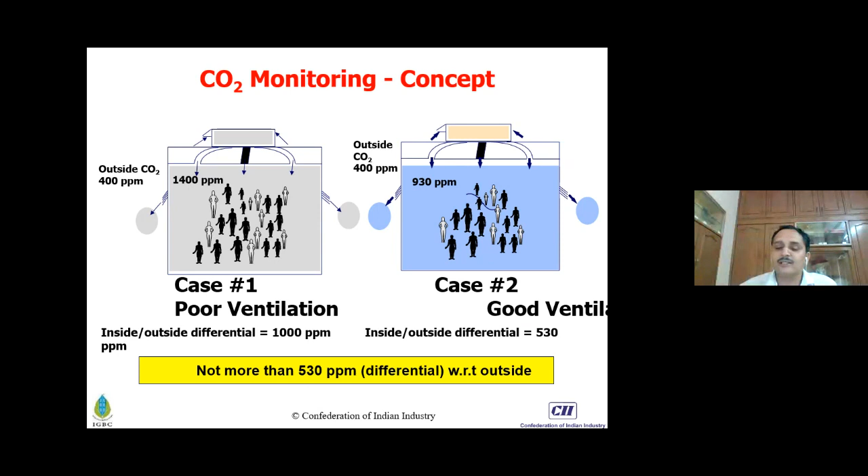This is one example where we don't have any limits. If you find some implementations that are rare and have true sense for the project with regard to tangible benefits, IGBC accepts such requests, and we call them innovation in design.

This is one good example of creating wealth for the country. IGBC, since 2001, understood this concept, having professional and accredited professionals for some kind of building certification.

IGBC accredited professionals are those who help facilitate projects and also help in implementation. Instead of a reward, IGBC gives 1 or 2 fixed credits for IGBC AP professionals. If they are part of any green building project, they get 1 or 2 extra credits or weightage for it. These are the people who really help facilities achieve real implementation for all the green measures.

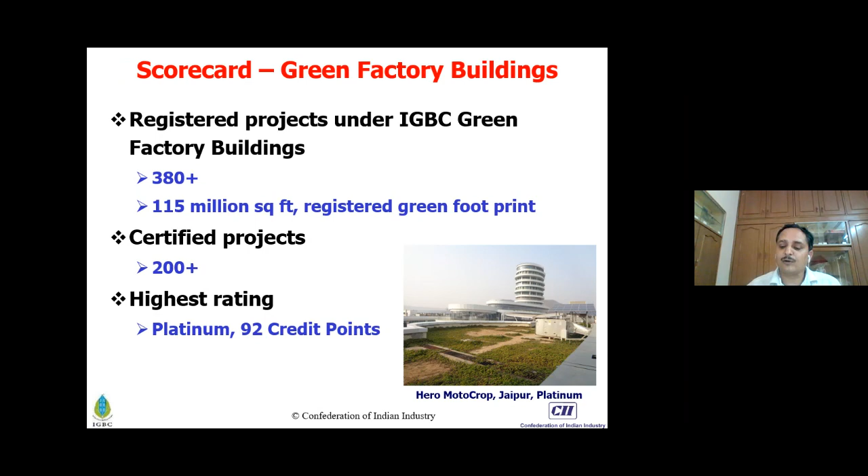So friends, till today we have more than 380 projects all across the country. It includes more than 115 million square feet of registered green footprint for factories. Till today we have certified more than 200 plus projects, and some of the projects have also achieved some of the highest ratings with regard to credit points.

This rating system is applicable for both new and existing buildings, and we have covered several sectors. We have received projects from engineering, automobile, textile, furniture, food and beverage, chemicals, and many other areas. Some companies have adopted the green building principles and green factory rating system, and they have deployed some of the good measures which I showcased during my presentation.

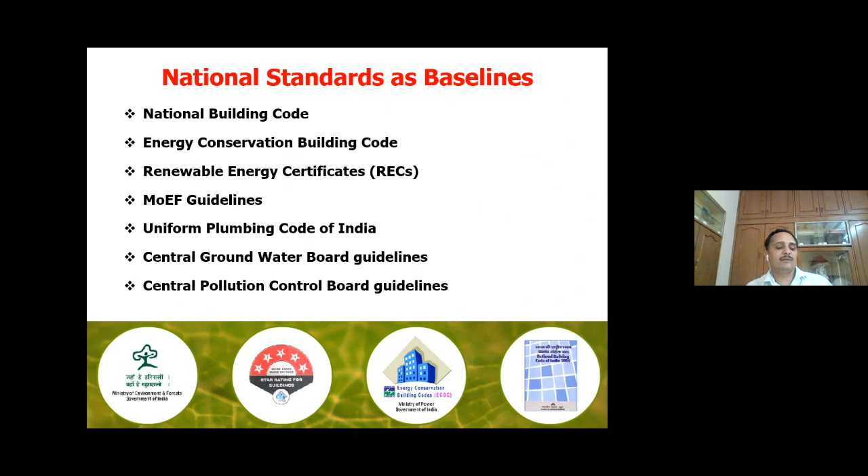When we go for green certification, we are 100% sure we are meeting all compliance requirements by the local bylaws or some central or state government laws in all the factory guidelines. Once we deploy it, we are meeting 100% compliance. IGBC has put in good efforts with MOEFCC, and if we go for green factory certification or green building, our EIA clearance would be much faster than any conventional project.

Green building certification has certain levels for a factory. If any project gets credit points between 51 and 60, it's called best practices, and the project gets the certification level. Similarly, any project getting 80 or more would be recognized at global level, achieving platinum certification. So basically there are 4 levels, all based on credit points achieved.

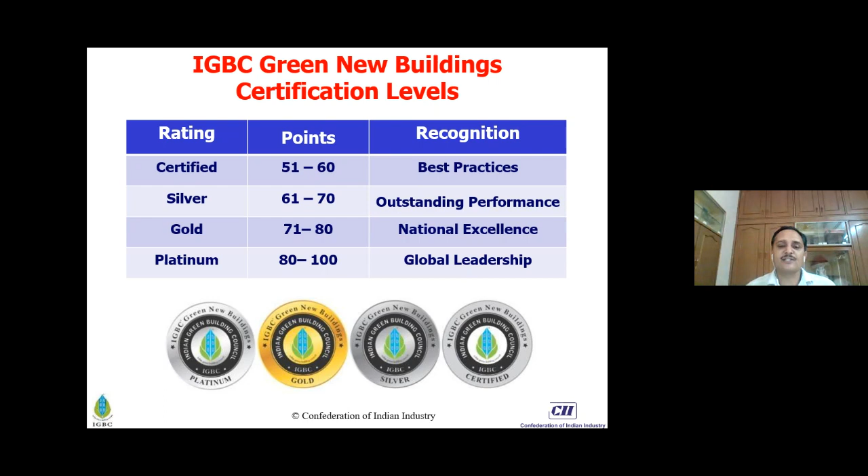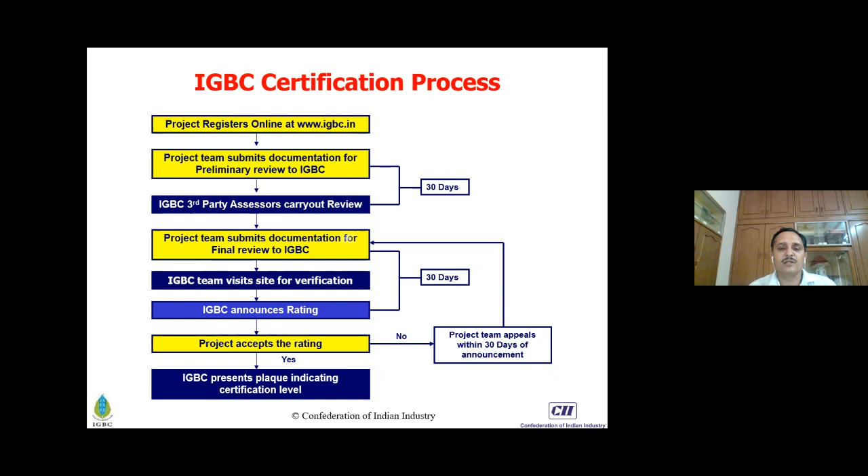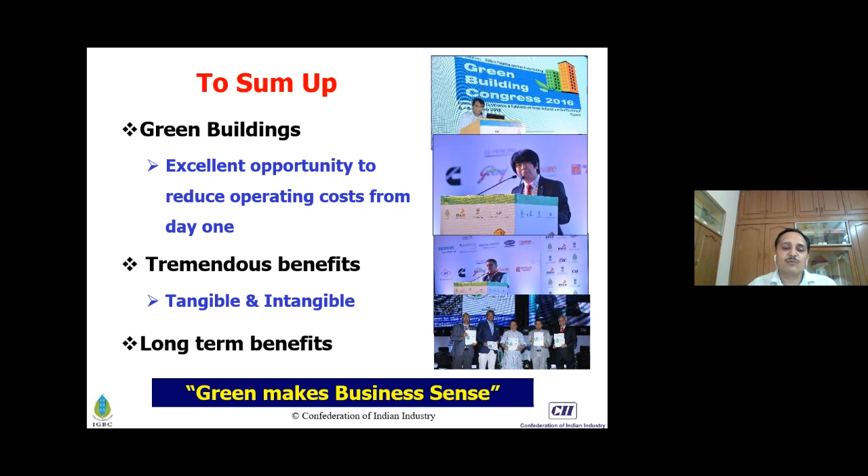To sum up friends, this is a great opportunity for the whole country to demonstrate our leadership role in green building footprint, which we may aspire to be #1 in the globe, #1 in the world. This is possible because it provides tangible benefits, intangible benefits, and is recognized by the industry. It also creates a performance improvement path for green building or green factory owners. So with this, I thank you all.